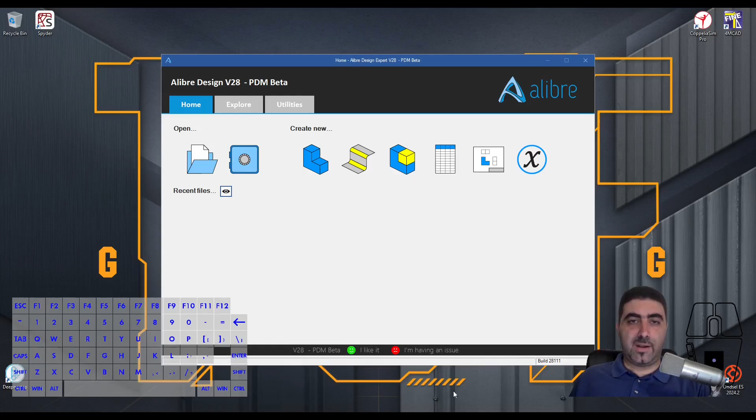The first thing we want to do is bring our I-beam table back up. Here we are, and we said our trolley is going to be used with these I-beams, so the widest one is a 4-inch. So I want my spacer shaft to have space for washers that, when stacked, are at least 4 inches tall. But I want a couple more spacers on either side. So that's what's going to guide my final length.

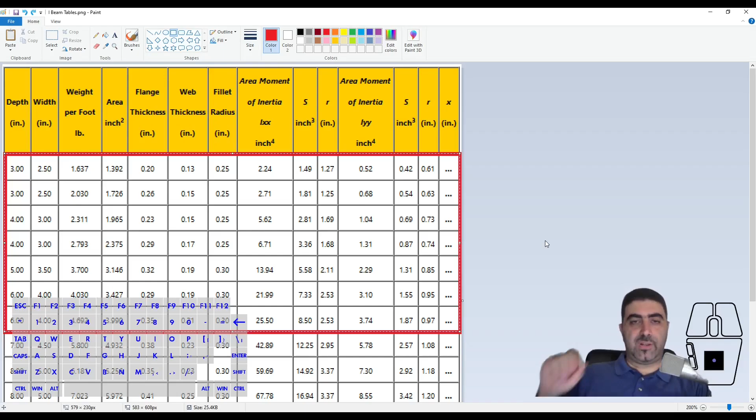The washers I'll be using as spacers are washers for a 1-inch thread, even though the 1-inch part of the cylinder is going to be unthreaded. On either side I will be using a 3/4 thread with a reduced diameter, I'll thread a 3/4 thread there and screw a flange nut on. The flange nuts on either side are what's going to be compressing the washers and keeping them in place.

This is going to be abundantly clear in the final episode of this series, where we're going to be doing the assembly. You'll see how this works.

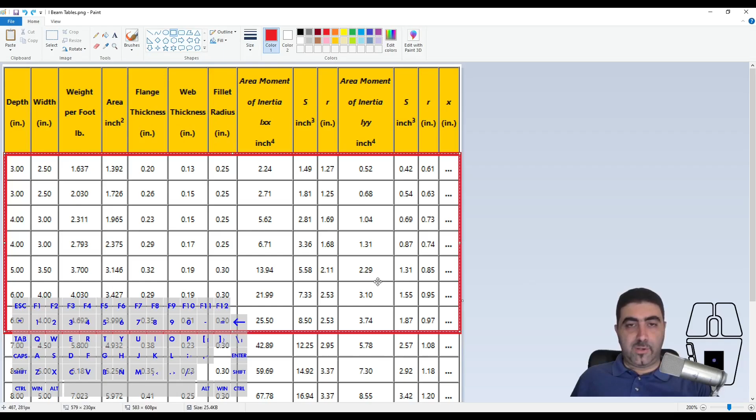But that means I need to know how thick the washers are. So I'm going into McMaster Carr: washers, inch, 1-inch, right? That's what a general purpose washer looks like, that's what I'll be using as a spacer. And there you go, it's got an ID of 1.062 inches and an OD of 2 inches. Now the thickness, it says it varies from 0.118 to 0.132.

That's why I want a couple of extra washers on either side, I don't want to be caught out by that. So I'll have a couple extra washers, and I'll design the washer to be at the maximum thickness. I'm not even going to download this, it's just 2 circles and an extrusion. I'll be designing that inside the assembly when I get there. But this is the thickness I will go for.

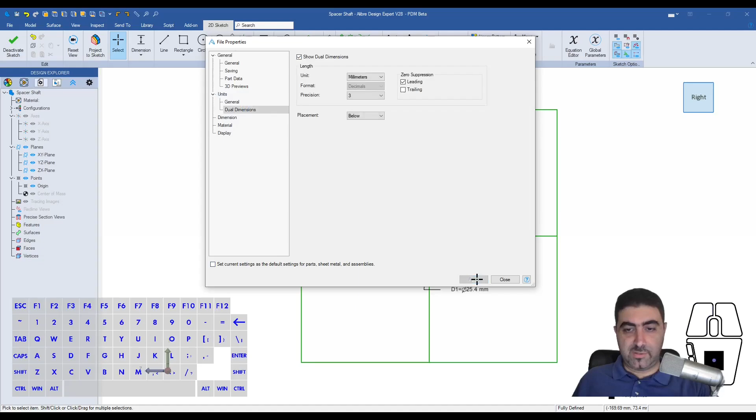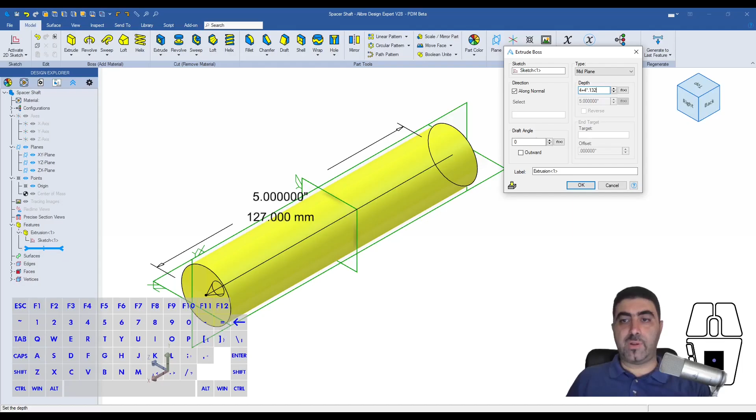I want 4 inches plus 4 times the thickness of the washer, which is 0.132. If I edit my extrusion again, that is the total length: 4.528. Now to that, I will be adding a couple of threads, and I want these to be 3/4 threads.

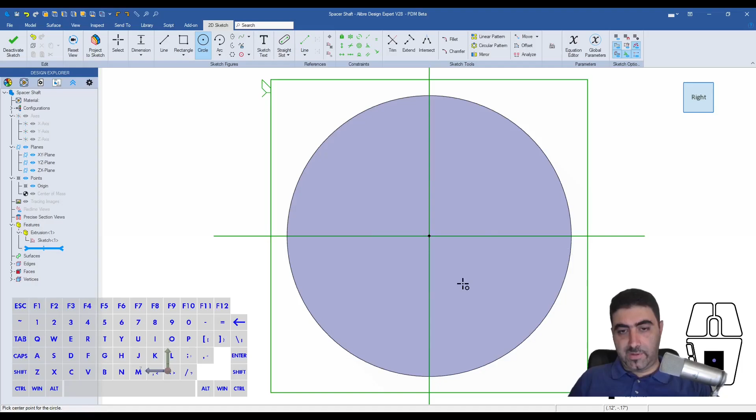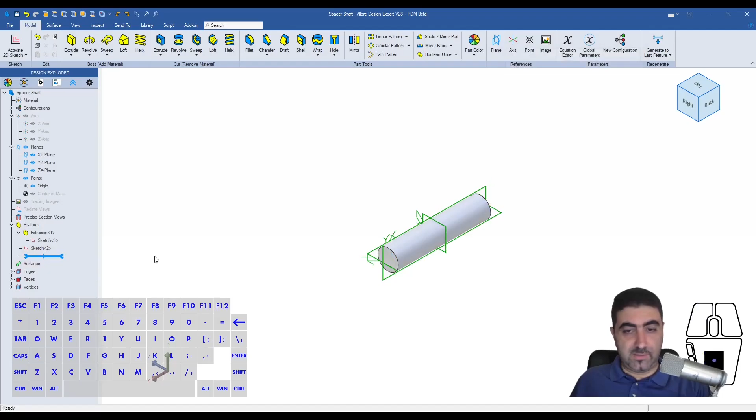So I'll do 3/4, and I'll extrude that for - yes, I need to check that out, because I will extrude that for just over the height of a 3/4 inch flanged nut. So before I go into my extrusion, let's get the sketches showing, but I need to go back in here and look for a flanged nut. That's for a 3/4 by 10 thread, right? So the height of that is...

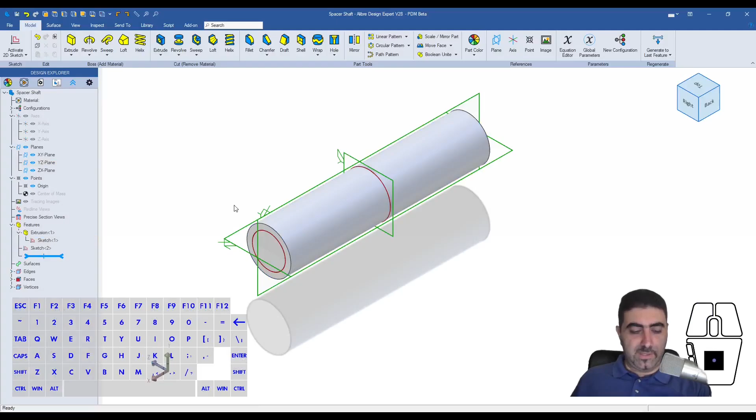41/64. So I'll just go in here, select this, extrude it for 41/64. How much is that? Okay, and if I do 11/16, is that more? Yes, that's by how much I will extrude that.

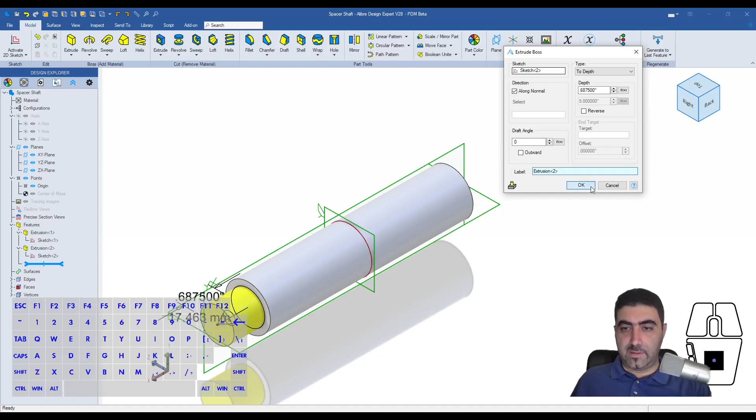Hit OK. Then I'm going to go here to the right underneath the hole tool, click that little triangle and get an external thread. I will select the outermost edge. I want to be doing ANSI unified coarse. It picked up that it's a 3/4 thread, telling me the unified coarse thread for that is 3/4 by 10 class 2A. That's fine. And I love this little option here in Alibre - it says create chamfer on edge. There you go.

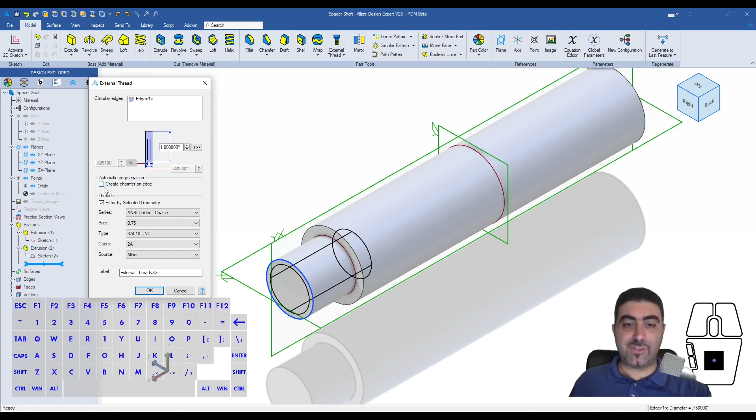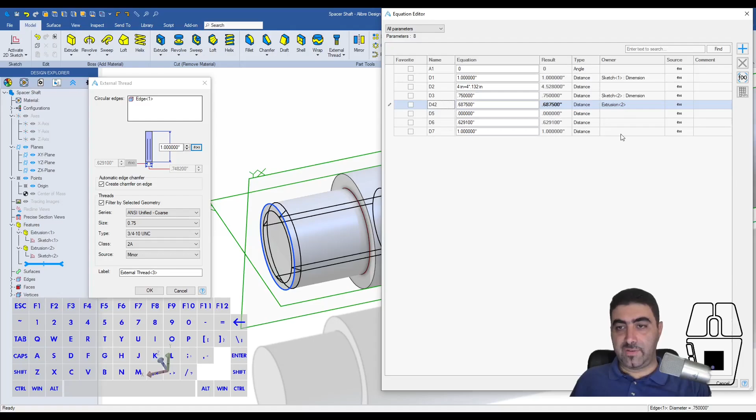And this goes on for a 1-inch depth. My thread will end there, and I might as well say so. Or I could even open up the equation editor and link the two. So that's the value, that's the 11/16, it's the length of extrusion 2. I might as well link that and hit OK, and that's it.

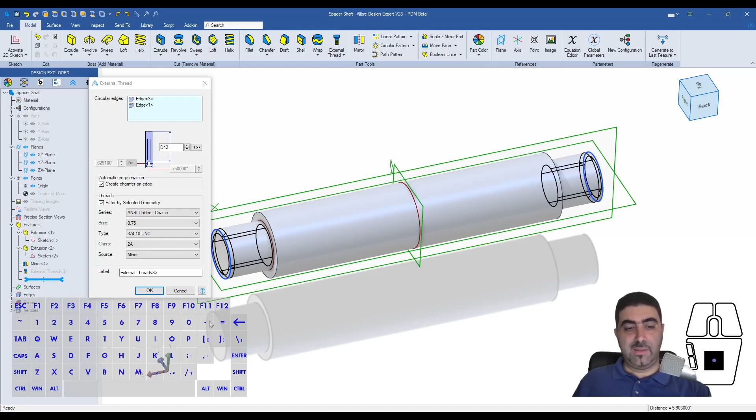Now all I need to do is mirror the thing. I don't think I can mirror directly, so I'll move the external thread underneath the mirror, and then select the other edge as well. Alibre knows what I'm on about, and it creates the shaft for me. Then I also want a small chamfer here, just a small one, to help me get the shaft through the hole every time. And that's it, that's the design of the shaft.

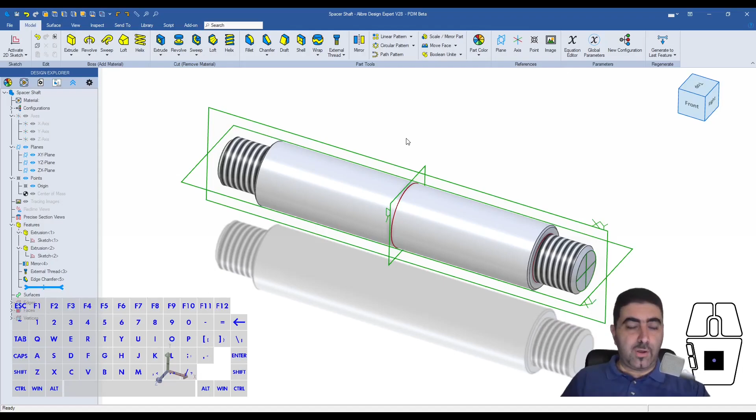When we're doing the 2D mechanical drawings that will get sent to manufacturing for a shaft like this, that's where we'll be specifying all of our tolerances. Although this has a very, very loose tolerance, it should go through that hole very easily.

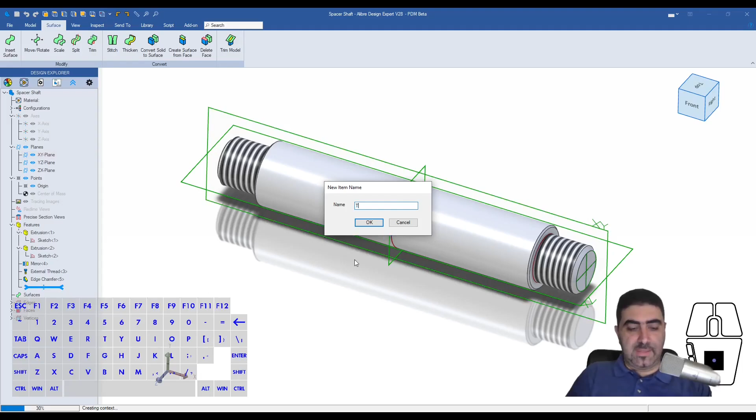Just to make sure our design is correct, I'll first save that as the spacer shaft, and then I'm going to use it to create an assembly. This is just going to be a test assembly to make sure that the nut I selected and the washers will work and everything is going to be in place as it should be.

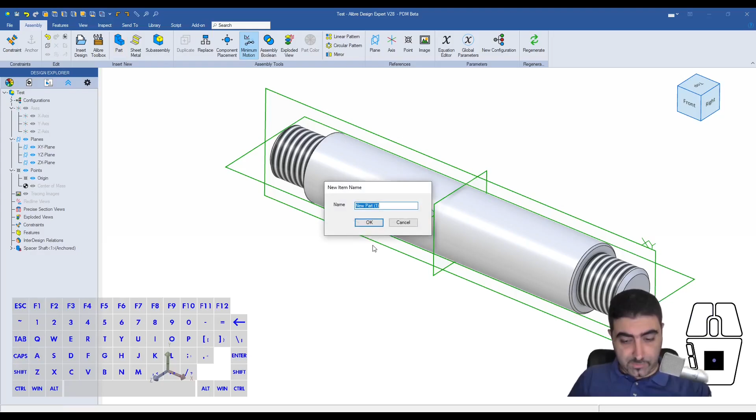When I'm clicking the origin, I'm just placing the first part so that the coordinate systems of the two match. I will then anchor it. To get a new part going, this is going to be the 1-inch washer, and I'm just going to start a sketch on the surface.

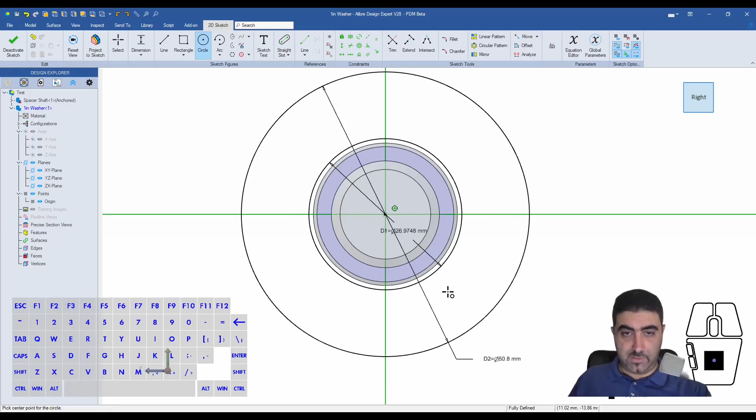The ID was 1.062 inches, and the OD was 2 inches. So I will extrude that - not that way, I want to go the other way - 0.132 inches in reverse. This is going to be the washer that I'll be using as a spacer, and they'll be packed all the way through the cylindrical piece of this shaft.

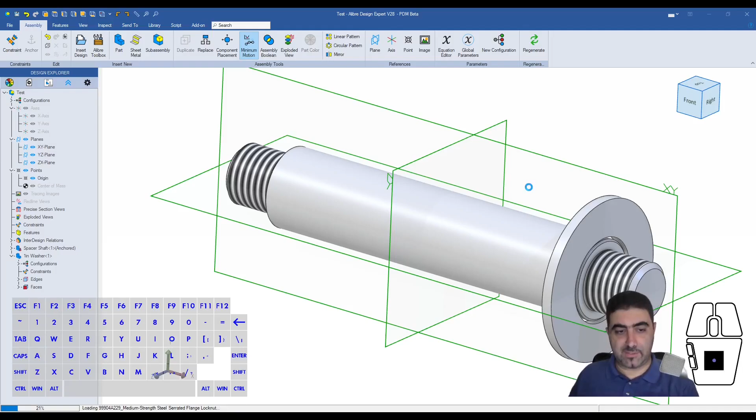Then on the end here, I will put on the 3/4 flanged nut, which is here. So that's how I use McMaster-Carr: I download the STEP file, I don't touch anything, I go into my assembly, insert design, bring it in from the download section. As it's bringing it in, it's going to turn it into an Alibre part. And there you go, file imported without errors.

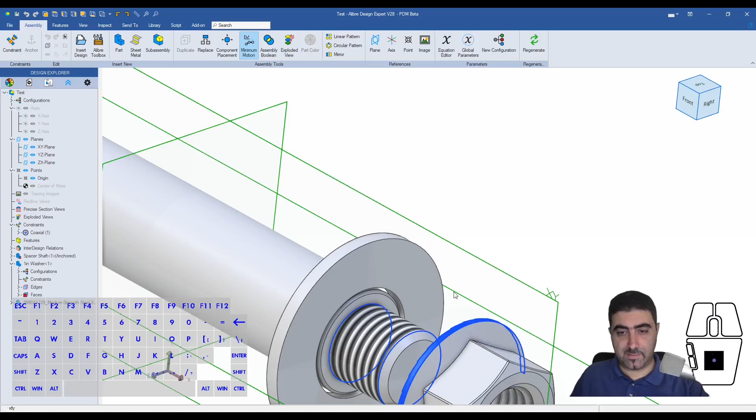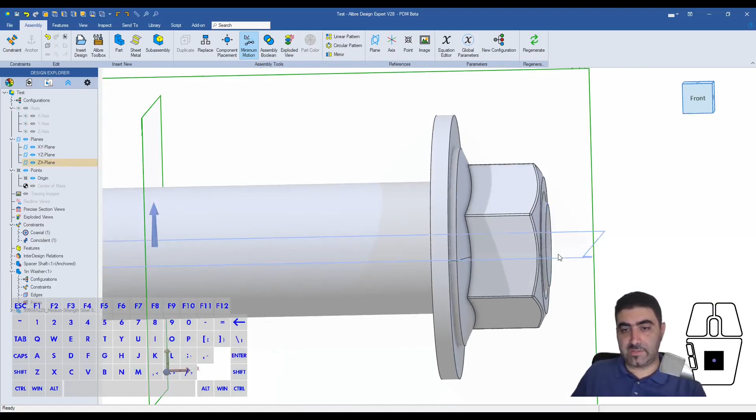Now let's open up my assembly constraints. I want to say that this and this is concentric - that's great. And I'll select this surface... this surface goes all the way in. I'm just showing you how this works. And there you go, this is how far out the thread is going to be sticking out. I can make that larger if I want to, but I can see that generally this will work.

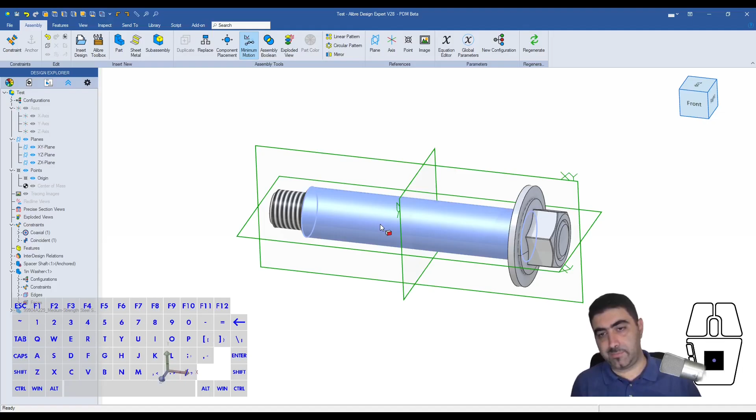I'll stack my washers in there, and when I put the nut on the other side, they will create a solid stack - nothing will be able to move, and that is what I want. Actually, to give me some more adaptability, I'll just make these a bit longer.

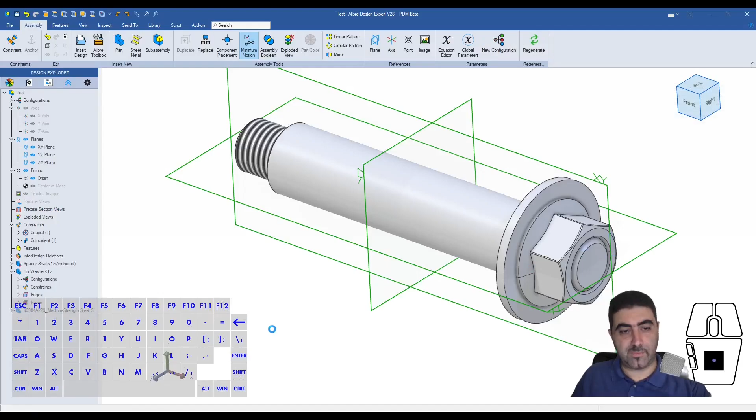Test assembly - I want to be in the downloads folder, in the I-beam Trolley folder. So I'll hit OK. I'll just open this up, and I will hold Control, double click on the feature, and I get this back.

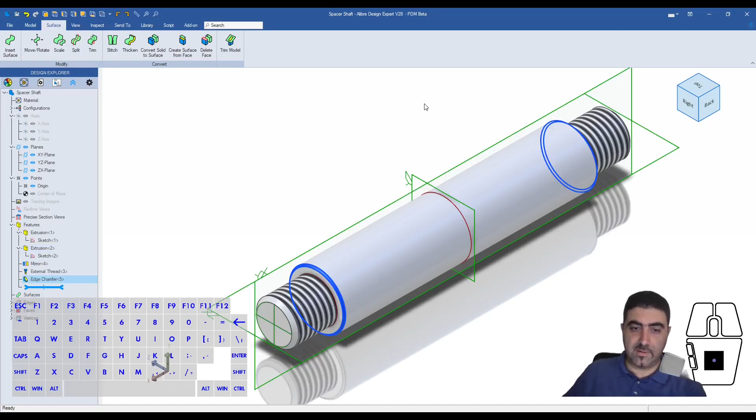I want to, you know what, I'll just make it 3/4, and that's it. I'll save it and close this as well. Now, when I open my test assembly, you will see that the thread sticks out a bit more, and that's fine, that's all I needed.

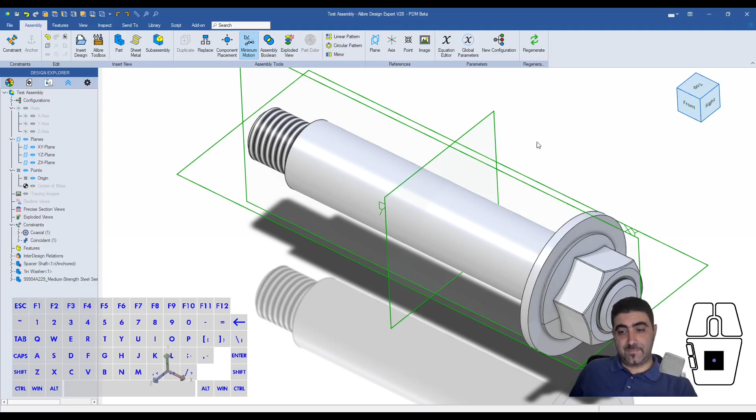So this is the spacer shaft. This will look a lot more useful and interesting when we do the assembly in the last episode, because you'll see how this works. I find this a great idea - whoever thought about it first was a really clever guy.